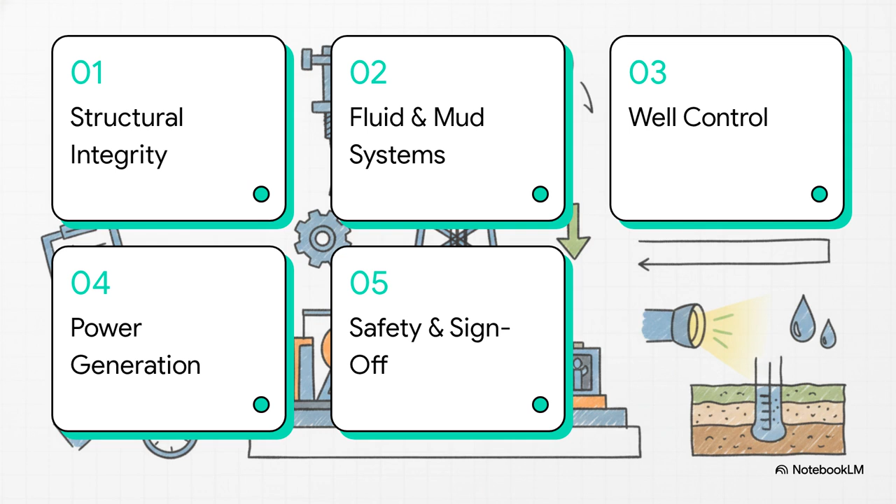So to tackle this incredibly complex machinery, we're going to break the rig acceptance process down into 5 critical pillars: structural integrity, fluid and mud systems, well control, power generation, and finally, safety and sign-off. All right, let's jump right into Pillar 1, structural and mechanical integrity, or, as I like to think of it, inspecting the bones of the rig.

When you're dealing with heavy machinery of this scale, a quick visual once-over just doesn't cut it. We are talking about verifying the derrick's API load capacity and closely inspecting the rotational equipment, like the top drive and the drawworks. Something as seemingly small as a bad saver sub thread or an overstressed drawworks brake line can lead to a catastrophic structural collapse or dropped pipes. Every single weld, bolt, and wire rope has to be flawless.

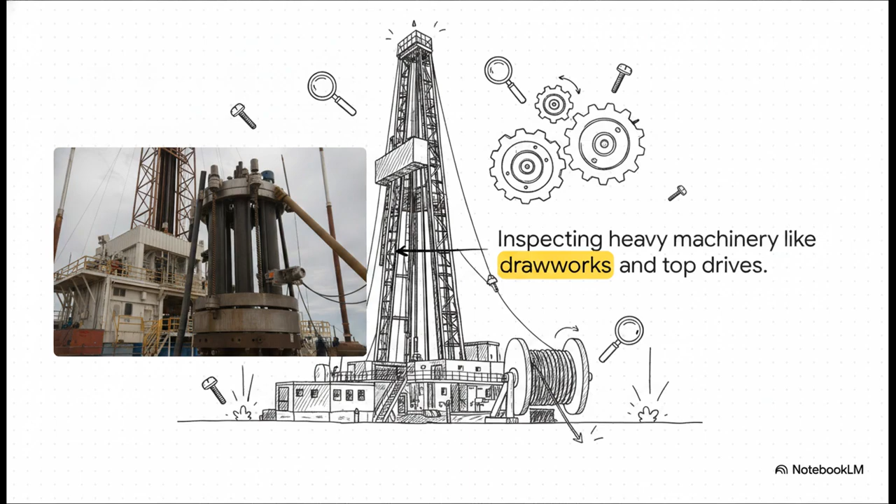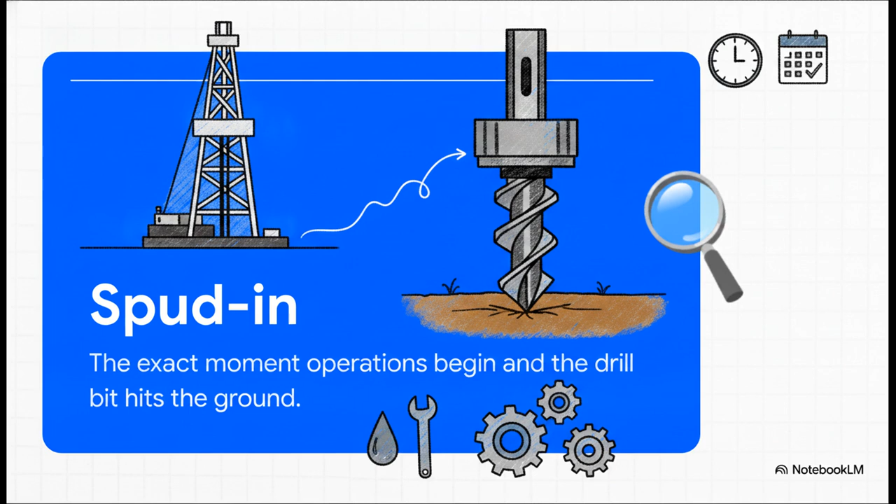And all of this intense mechanical scrutiny absolutely has to happen before spud-in, which is just the industry term for the very beginning of drilling operations for a new well. Catching mechanical failures before the drill bit ever hits the dirt is the ultimate goal here. Just an hour spent reviewing a top drive's gearbox oil pre-spud can save literally weeks of unplanned standby time once the rig is fully committed to the hole.

Moving on to Pillar 2, drilling fluid and mud systems. This is essentially the bloodstream of the entire operation. You know, it's actually wild how tiny failures in this system can cause massive chain reactions. Just picture a tiny tear in a shale shaker screen. It seems completely minor, right? But that tear bypasses solids straight back into your active fluid system. Suddenly, your mud properties completely tank, you are bleeding money on replacement chemicals, and wellbore stability is totally compromised.

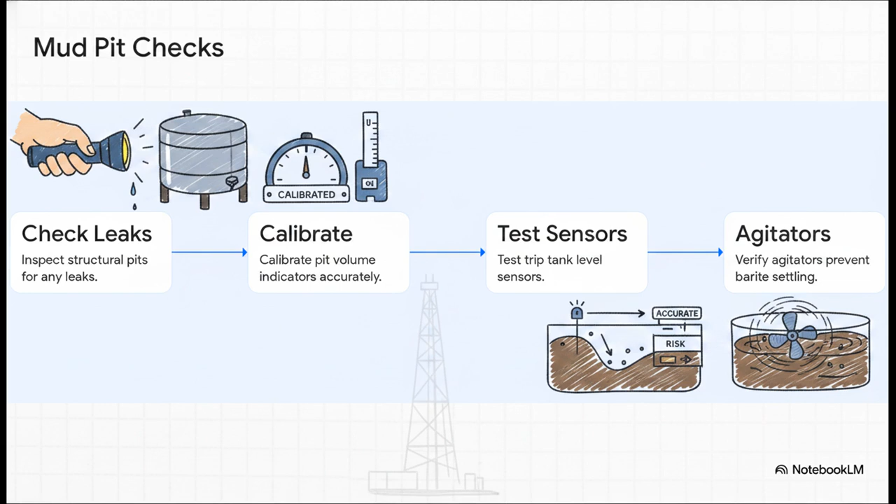To guard against that, inspectors get right in there. They physically check the structural pits for leaks and verify that the agitators are actually preventing barite from settling. But the real kicker here is calibrating the pit volume indicators. If those sensors are off by even a few barrels, you're looking at a massive well control risk. Why? Because you might entirely miss the subtle fluid volume increase that tells you a kick is happening.

Okay, let's hit Pillar 3, well control and blowouts. This is the ultimate defense mechanism. When we evaluate the blowout preventer, or BOP stack, against the maximum anticipated surface pressure, or MASP, there is absolutely zero room for error. Every single component, from the annular preventers sitting at the top all the way down to the heavy pipe rams at the bottom, must be brutally pressure tested to handle this exact limit.

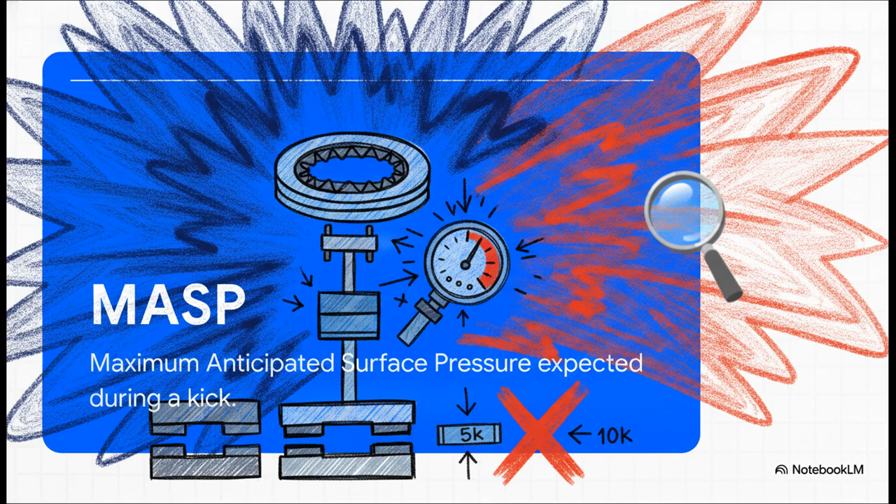If a component is rated for 5,000 psi, but the MASP is expected to be 10,000 psi, you stop the rig immediately, no exceptions. But here's the thing. A blowout preventer is just a giant piece of useless iron if you don't have the power to actually close it.

That's where the accumulator unit comes in, and its readiness checklist is intense. We're verifying nitrogen precharges at around 1,000 psi, testing the backup pumps, and rigorously checking hydraulic levels. If the rig's main power completely dies during a blowout, this stored hydraulic energy is the solitary way to slam that preventer shut and save the rig.

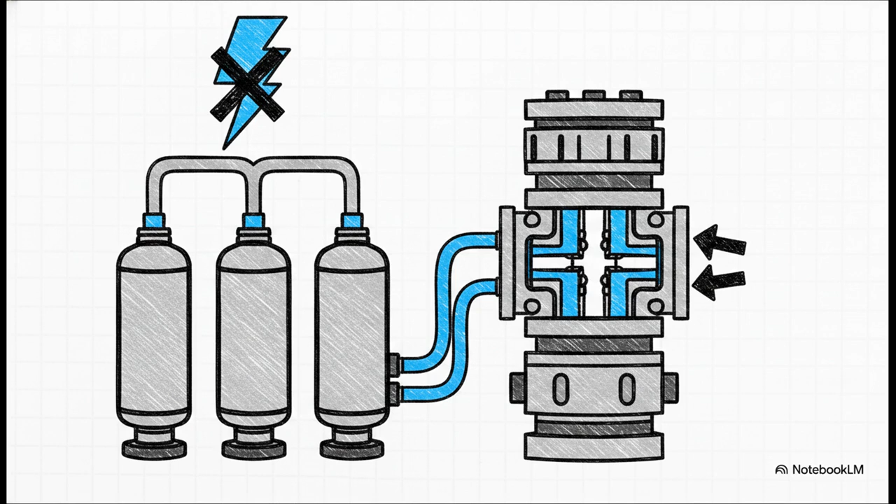Next up is Pillar 4, power generation and electrical. This is the heartbeat, keeping the rig alive. Now, you don't just flip a switch on these massive generator sets to see if they purr nicely at idle. Proper rig acceptance demands a brutal stress test.

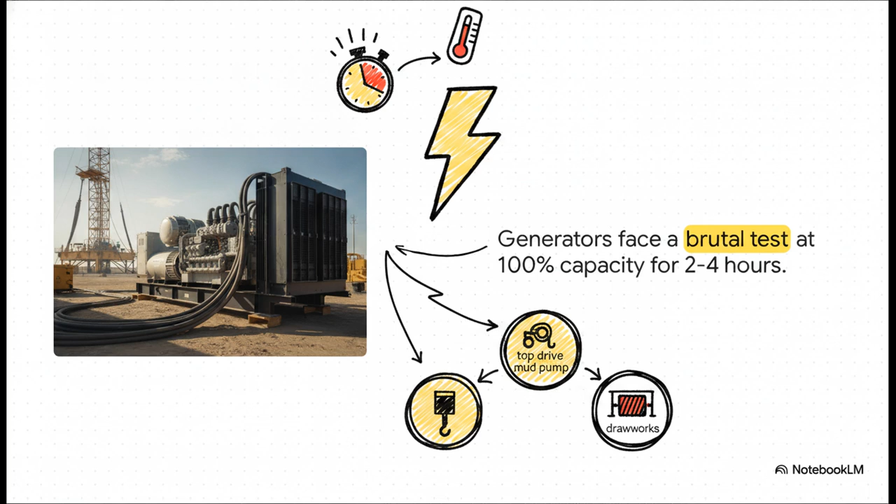All the major loads, the top drive, the mud pumps, the drawworks, are run simultaneously at 100% capacity for 2 to 4 solid hours. We are actively hunting for any hidden capacity issues, overheating, or weird voltage fluctuations well before operations start.

Inspectors also have to be absolute sticklers for hazardous area classifications. For instance, in a Zone 1 area where flammable gas is expected to be present, every single piece of electrical equipment has to be completely explosion-proof. If a standard, unclassified light fixture somehow makes its way into a Zone 1, or even if a grounding wire is slightly loose, one invisible spark could trigger a catastrophic explosion.

Which brings us to our final stop, Pillar 5, Safety, Environment, and Sign-Off. Think of this as the human and environmental safety net. Because let's face it, perfectly tuned machinery means absolutely nothing if the crew isn't safe. The physical safety checks here are relentless.

Inspectors are out there testing fire and gas detectors with actual target gases and making sure that break glass alarms actually trigger the sirens. They verify that highly specialized H2S escape respirators are fully stocked, unexpired, and, most importantly, immediately accessible right at the point of need, not locked away in some distant closet.

And this safety net extends straight to the environment too. A leaking mud pit or a poorly contained diesel tank, that is a fast track to severe ecological damage and immediate regulatory shutdowns. That's exactly why containment berms are aggressively sized at 110% of the largest tank. It basically ensures that even if you have a total, catastrophic tank rupture, the spill won't breach the site perimeter.

Now, finding a problem during all these walkthroughs, that's really only half the battle. Just pointing a finger at a leaking valve or a missing permit isn't going to fix it. The rig acceptance process demands that you trace every single issue back to a formal non-conformance report, or NCR, to build a strict, binding corrective action plan.

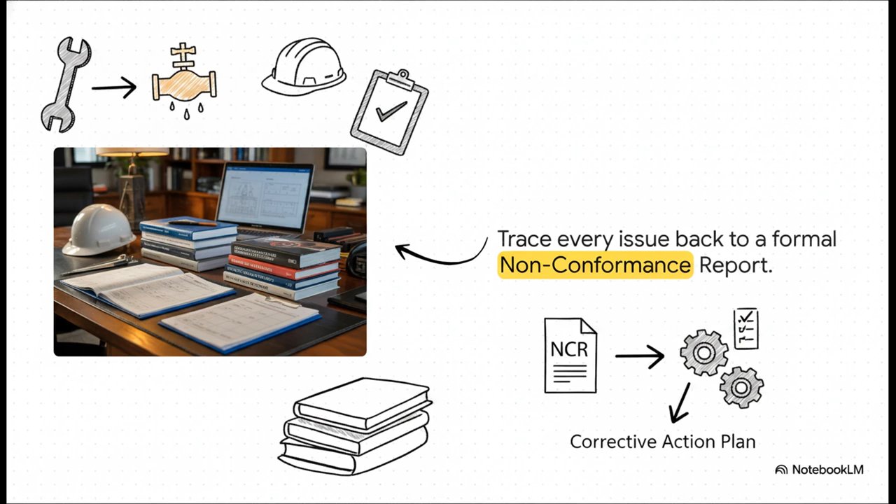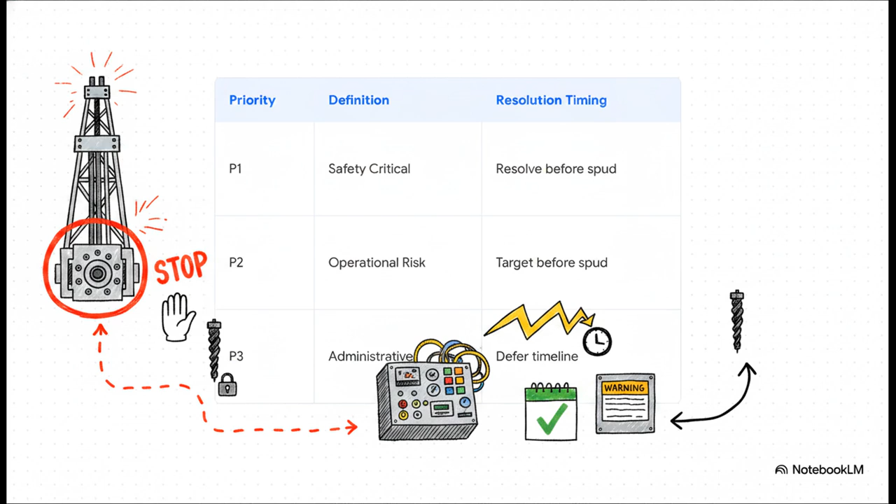Of course, not all of these findings are created equal, which is why strict prioritization is an absolute must. Take a P1 safety-critical issue, like a failed blowout preventer test. That halts absolutely everything. The rig simply cannot spud until it is fixed. But say you have a P3 issue, maybe a faded label on a non-critical panel. That can usually be safely deferred with an agreed timeline so operations aren't held up unnecessarily. It's all about calculated risk management.